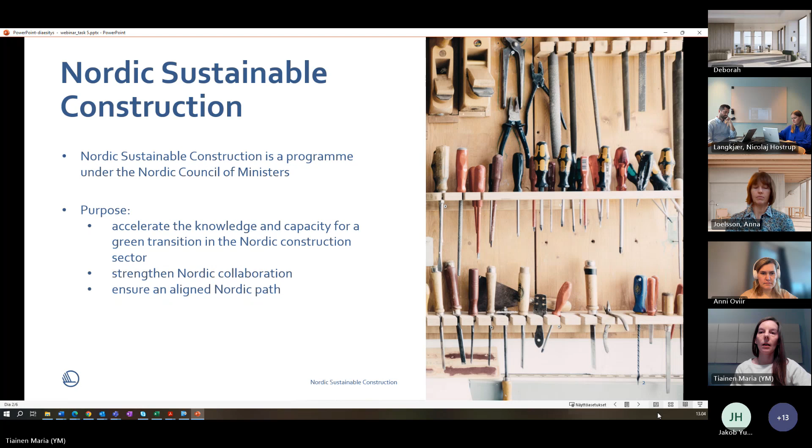The program is organized into the following 5 work packages, working with a specific area of sustainable construction: Nordic harmonization of life cycle assessment, circular business models and procurement, sustainable construction materials and architecture, emission-free construction sites, and program secretariat and competencies for reuse in constructions.

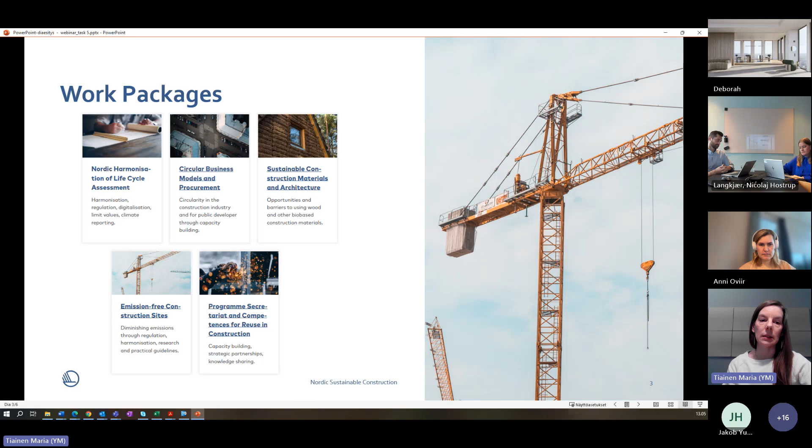This webinar and project belongs to the first work package, Nordic harmonization of the life cycle assessment. In this work package, we work towards harmonizing normative methods for building LCAs in the Nordic countries. Similar approaches will benefit construction industry and policymakers on national and municipal levels so that we can support each other's climate ambitions in regulation and in green public procurement, but also in European policy development.

Here is the subtask of the Nordic harmonization of life cycle assessment, work package 1. So we have 5 tasks: Nordic LCA practices, database and scenarios, digitalization of LCA, limit values, and the 5th task, acceleration program. We will hear more about this today, or one of its subtasks.

The target of the acceleration program is to accelerate the low carbonization of the building sector and support building projects aiming at lesser emissions. There are two subtasks of this task 5, and we will hear more about one of those subtasks today.

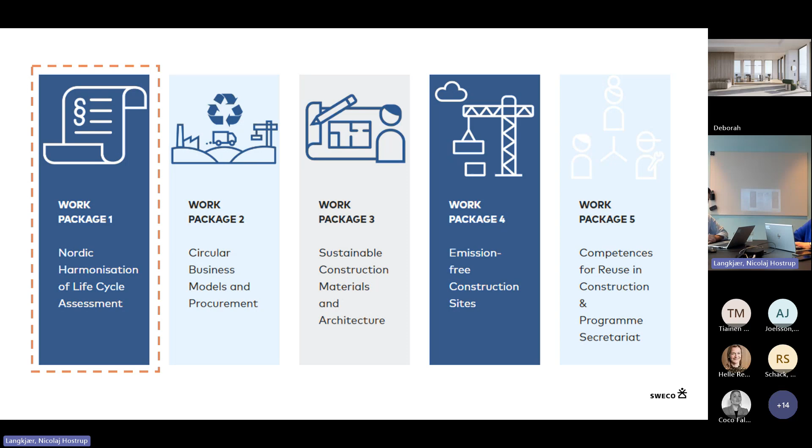It's a very interesting report that I think you should go in and read. It's on the webpage also, the Nordic Sustainable Construction webpage. So the project we are presenting today is placed in this work package 1, the Nordic harmonization of LCA.

Work package 1 consisted of 5 tasks, all with the goal of investigating possibilities and challenges for harmonizing LCA in the Nordic countries and Estonia. There were tasks about LCA practices, data for LCA, calculating LCA with digital models, limit values, monitoring decarbonization, and regulatory needs for harmonizing. This has all been studied, and several interesting reports have been published, all to be found on the Nordic Sustainable Construction webpage. Go in there and have a good read of all these reports.

Task 5 in this work package, which we are presenting today, is this acceleration program with knowledge sharing clinics and a best practice catalog.

It was divided like this: we call it task 5.1 and task 5.2. Task 5.1 is these knowledge sharing clinics, which we are also calling low carbon clinics. That's why we have the title on the report, which is low carbon clinics. Task 5.2 is this best practice catalog, which we launched back in, I think it's a month ago, right before Christmas.

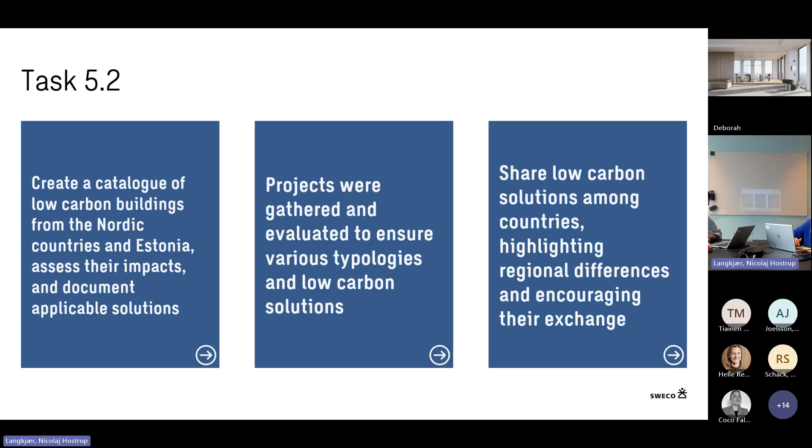In task 5.1, the aim was to increase the know-how in the market. We ended up having 11 clinics with workshops for clients with projects in various building phases. We both had some projects that were in a very early design phase, and we also had projects that were about to be built. The aim was to share these real life decarbonization solutions and challenges in different phases of a building project.

Just a little bit about the timeline for this project: we started out back in June, where we had a first webinar where we shared a sign-up link, and then we had this sign-up period over the summer, and then we started hosting these low carbon clinics. The low carbon clinics consisted of first a startup meeting where we tried to figure out what the client wanted to talk about, what was important for them to focus on, of course with the mind on decarbonization. But if they had something specific that they wanted to go into, some specific solutions, some specific building materials that we needed to discuss, or some specific processes, then we could actually focus the workshop that we held.

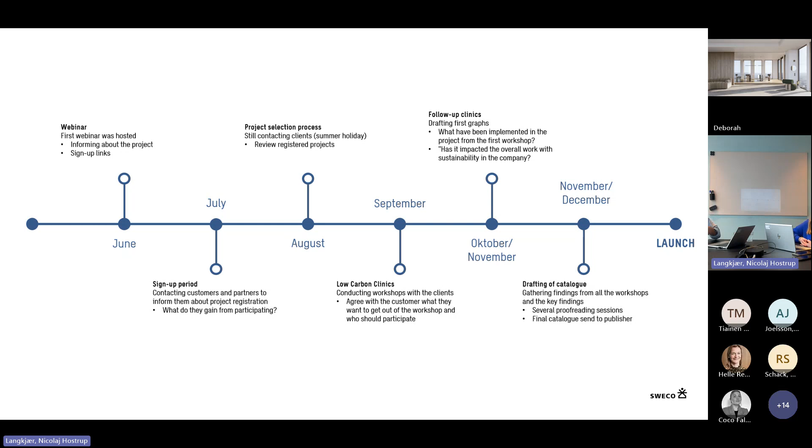After we had this startup meeting with the client, then we had a workshop where we went deeper into the project, both the challenges and solutions. After the workshops, we had some time between a workshop and a follow-up to see if the client had implemented any solutions. We were a bit short on time here, so it was short time to actually implement a lot of solutions in a project. But at least we have some reflections from the clients, from the workshop until the follow-ups. So that's what we're sharing in the report also. And then we of course drafted the report in November, December. So we ended up with these

2 projects from Denmark, Iceland, Finland, 3 projects from Sweden, and 1 project from Estonia and Norway. And I have the link to the report down here in the bottom.

And I will just quickly share some of our key findings for solutions when working with the decarbonization agenda, that we found from these 11 clinics, and then also some key challenges that we found from working with these clients.

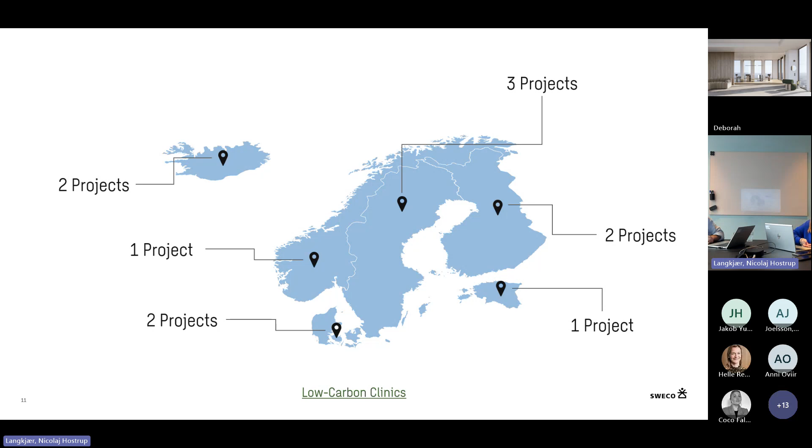So next slide here, we have these 4 key findings that you will also find in the report. So the carbon limit values and continuous LCA monitoring. Several projects focused on adhering to climate budgets and continuous LCA monitoring. One of the projects from Denmark, we found that the client worked with both their own and also the investors' CO2 requirements to the project. So that was a constraint, and that actually worked for them to keep the climate impact from the buildings lower.

And then we had hotspot analysis and data for early insights, which we found to be quite essential for identifying carbon reduction opportunities. This early data insight necessitates collaboration from stakeholders throughout the entire value chain. Some of the clients emphasized the need for new agreements or new ways of working together across disciplines regarding data delivery for these early insights. Because right now, at least a lot of disciplines are not used to delivering this data, and many disciplines maybe want to wait with delivering specific data for constructions, for example. So maybe some new ways of working together or new agreements is the way to go for these early insights on data.

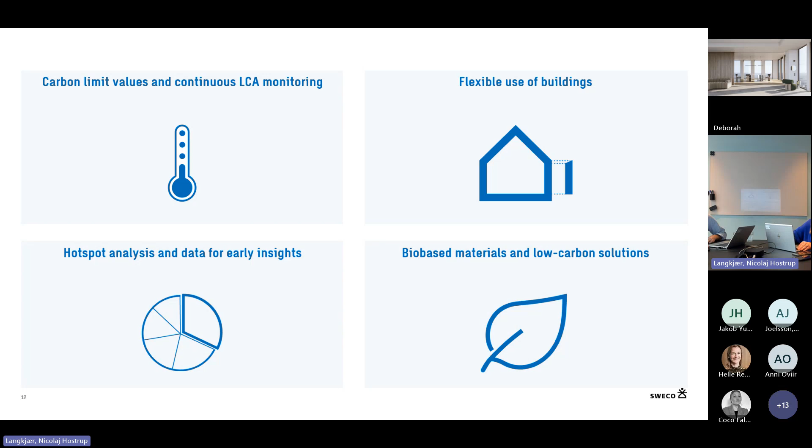So variability in LCA methodologies, particularly in certification schemes, not being the same methodologies as in the national regulations. This is a significant challenge because it requires a lot of time spent on making LCA for one method and then for another method. And you could say that this is also a cross-border challenge. This is what we found from our work in, we also delivered some work for this task 4, which was also presented by Maria, where we found that as it is now, we cannot really compare LCA results across borders because the methodologies are so differently structured. So this is also kind of a cross-border challenge.

Yeah, so we also had material-related challenges, also emphasized in many of the clinics. We had, for example, one of the clinics in Finland where concerns were raised about the long-term performance of some of these newer low-carbon solutions, because they haven't been tested for this long-term performance. And some projects also faced difficulties in sourcing low-carbon materials that fulfill the functional requirements that they needed for the project.

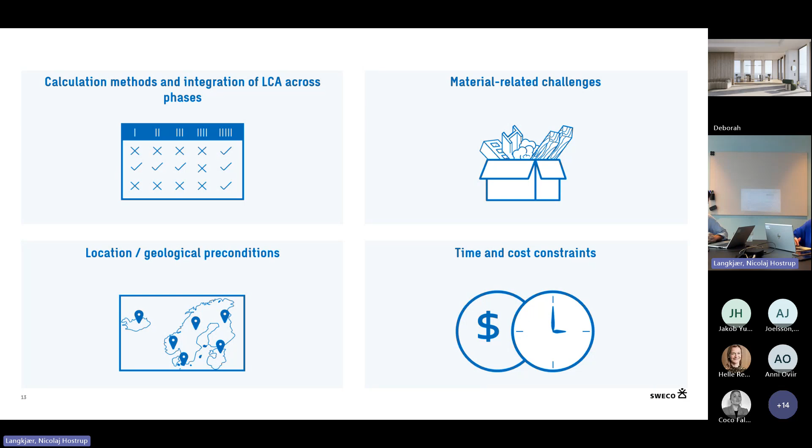Hello, everybody. So I'm Anni from Estonia, and I will represent the Estonian case for this clinic. I'm warning you in advance, I might cough in between, so I'm trying to mute myself for that moment when it happens. I'm a little bit sick.

But yeah, about the project. So the project for this clinic was Loodusmaja, that means the nature house. It's a museum and an office, consisting of 15,250 square meters of net floor area. And it is currently under construction, so it's being built right now.

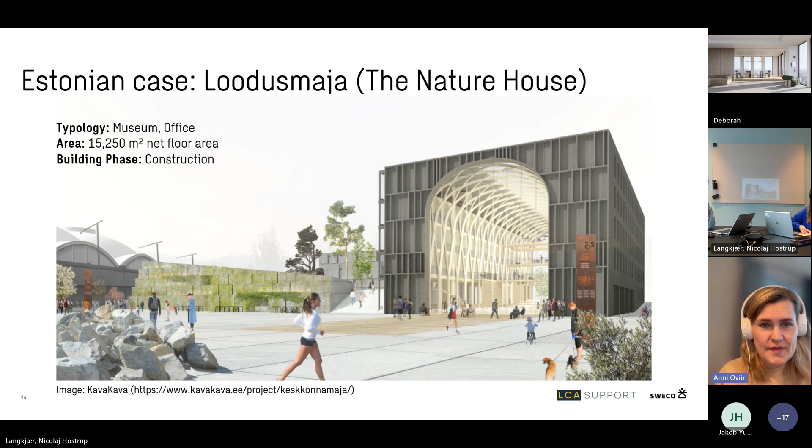So the building itself consists of three parts. The A bit is museum, and the B and C are an office space for the Ministry of Climate, as well as Natural History Museum and other environment-related offices and organizations. This project was very good for me personally, because I was the one who conducted the life cycle assessment for this back in 2020 and 21.

And it is the first public project for which an LCA was conducted in Estonia, so it's like a pilot project in many ways for us. The LCAs that were done were for preliminary and technical design. This previous work was used inside the clinic workshop.

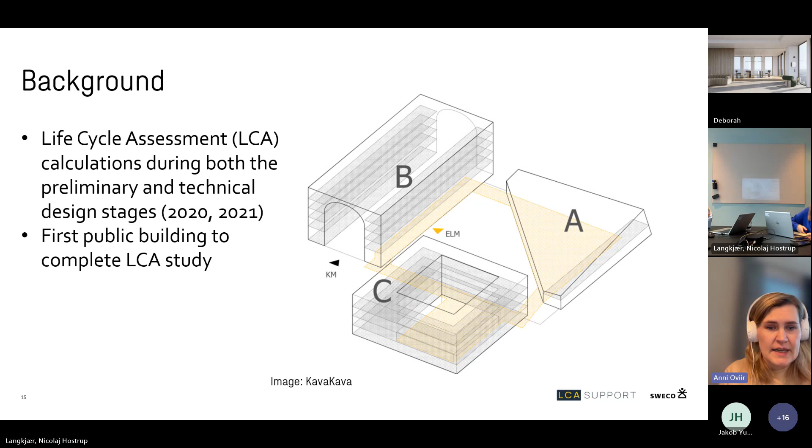The workshop took place on September 18th, and the participants were from the entire project team. So client, the state, people from Riigi Kinnisvara the state real estate manager, the Ministry of Climate, contractor, architects and engineers. In total, we were 14 people.

Unfortunately, I didn't remember to take a picture, but it was a good group we had together. Lots of the people involved with this project today were not the same people who were involved when I first did the LCA studies for this project, so part of this was also just reminding them of what was done.

The key topic we had was analyzing the completed studies. So we went through the LCAs that I completed, and we were looking at what were the hotspots, and just went over the study. It might sound like a very basic thing to do, but Estonia is not as far with low carbon construction as the Nordic countries are.

We are aiming to fix that, but at the moment it's not common practice at all to calculate LCA for a building project. It's rather a rare case if the developer is looking to the future, or typically developers who have more resources to do so, and sometimes in cases where the owner is pursuing a green building certificate, but generally it is not common practice here. So this is like a very important pilot case for the public sector.

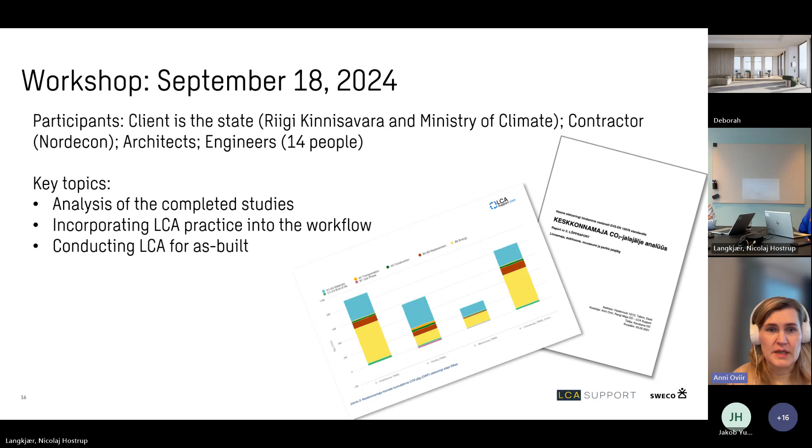And the last key topic was how to conduct LCA for as-built of this project. That was something Riigi Kinnisvara was specifically interested in, because they want to understand how to put together LCA for as-built projects. That is also a first time in the public sector in Estonia, and I'm not even sure if generally there has been any building projects in Estonia where as-built LCA has been conducted. So that was one of the most important topics in this workshop.

We'll stop on the key takeaways and try to open different angles on what came out from this workshop. First, we discussed how to integrate the process. The process really needs to be mapped out, and we don't have a very clear understanding yet of how this process should go.

Coincidentally, yesterday I had a meeting with the Estonian Digital Construction Cluster, whose members are also people involved in this project, and we discussed again that it's about the process. One of the things mentioned was that it's very unclear at the moment who is the party responsible for conducting an LCA. It's not clear who should take responsibility, who are the people who actually need to learn about LCA, or who are the people on the other end who might need to check the LCA so that quality wouldn't be poor once the LCA requirement comes into place.

For background, the roadmap for Estonia has also changed. We had understanding until the end of last year that the mandatory requirement for calculating LCA would be enforced 1st of July 2025. But with the delay in taking over the climate law, that has also postponed implementation of the regulation requiring LCA calculation, so most likely it will be in place 1st of January 2026. That has even more created a situation where the market doesn't necessarily have the initiative to start understanding the process and to figure out who should be responsible for this calculation. So that was a big part of the discussion in the workshop.

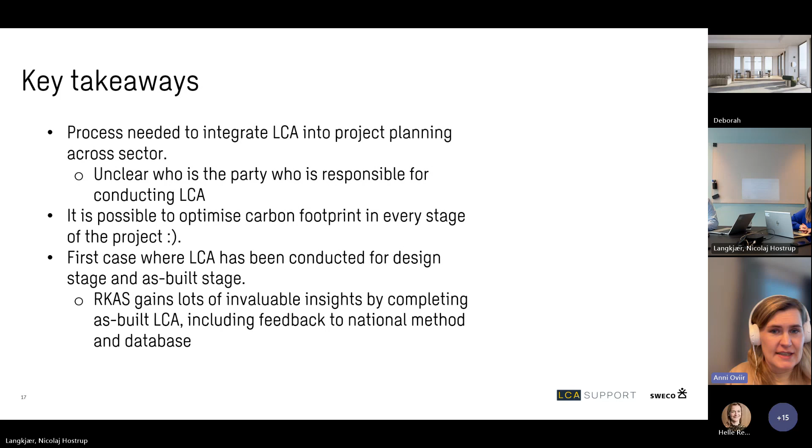So all in all, how I would like to sum it up perhaps is that Estonia is really in the beginning of this whole journey, and through this project, part of task 5, but also other tasks, has actually brought lots of knowledge to Estonia. We have learned massively from this project to get going with this topic, and I think from here on we can only improve.

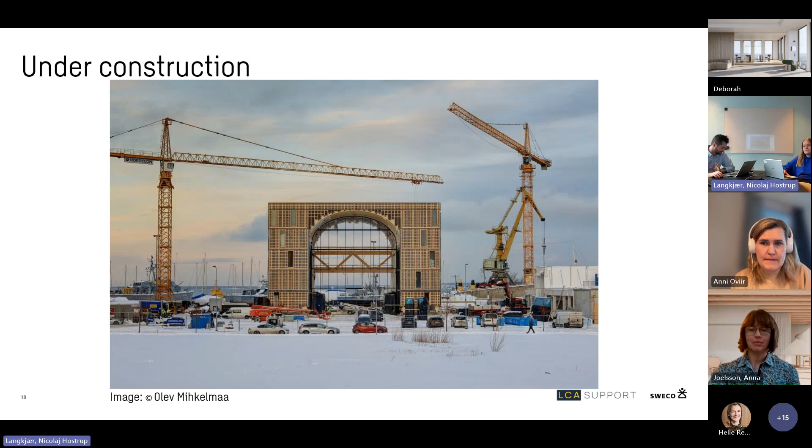Yes, hello everyone. I'm Anna, working at Sweco in Sweden, and I took part in 3 workshops in Sweden for 3 quite different clients. Catena is a developer of all kinds of logistics buildings all over Scandinavia. Then we have OBOS, one of the larger developers of housing in Sweden and Norway, and then we have Umeå municipality in the north of Sweden. All of these clients have high ambitions, lots of knowledge, and have come quite far already in reducing CO2 in their projects.

And in general, it was these ambitious clients that applied for the workshops in Sweden. That was a clear trend. But of course, that does not mean that there are no challenges left. So if we take the next slide...

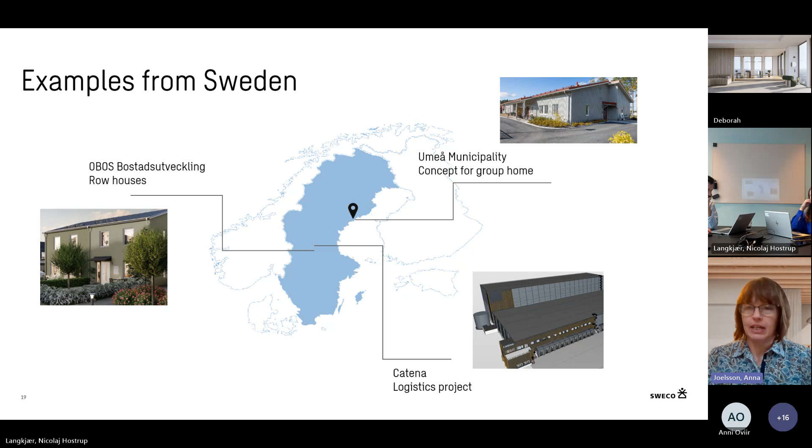We start by talking about logistics projects, and just to mention first some special conditions of a typical logistics building that can affect the results of an LCA calculation. For example, a warehouse can have a high ceiling and thereby larger outer walls compared to indoor floor area than other projects. Since carbon emissions in Sweden are reported per gross floor area, this might give an impression of high carbon emissions compared to other buildings.

But then again, this type of building typically has few inner walls and maybe a small amount of room completions, and this can work in favor of showing lower emissions than other buildings of the same size.

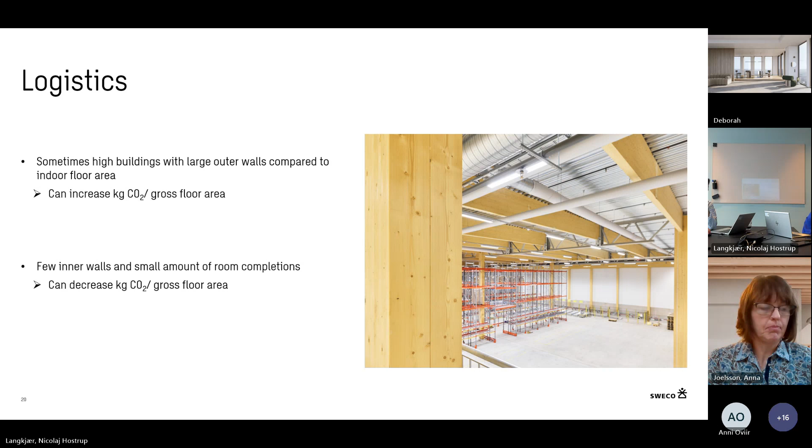If we go to the next slide, we also discussed at the workshop some technical issues, and the main one was how to find an alternative to the traditional outer wall construction with sandwich panels, which are common in logistics buildings because they have a quite high climate effect and large emissions in production. But there are several benefits for the contractor and developer working with sandwich panels, not least that they are fast to assemble, require little maintenance, and have a relatively low cost. So these reasons are why they are so extensively used.

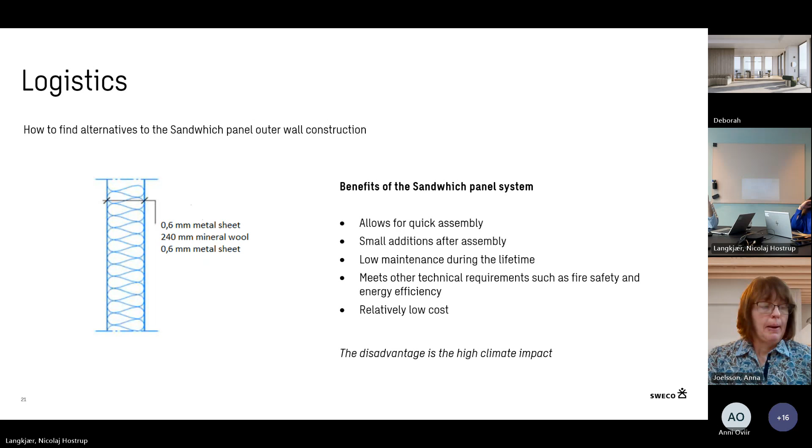So you can see that there is a difference, and it's relevant to compare things. The problem with this particular wooden wall is that the cost increases, which is negative for the project, and also that the facade is not included in the construction. So the emissions vary quite heavily depending on the choice of facade. That's the red dotted bar that you see, which represents the span of emissions depending on what facade you combine this construction with.

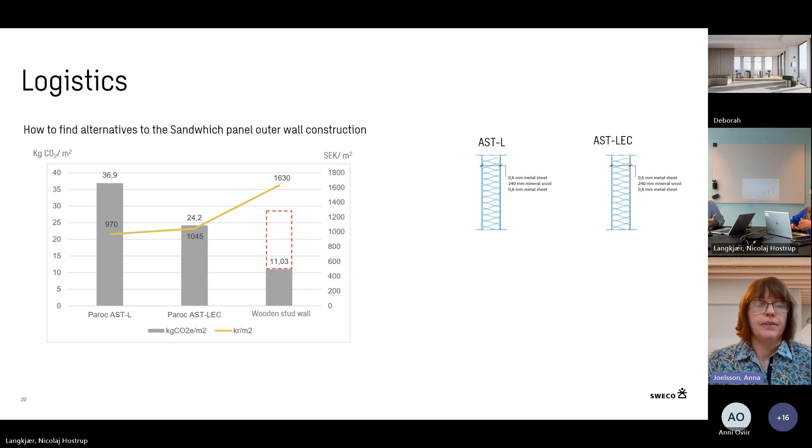But it doesn't really end here. If we concentrate on these two different sandwich panel walls that we had, the ones to the left and in the middle, maybe you noticed that I said they are identical. So the same type of materials, metal sheets with mineral wool in between, and they have the same dimensions and thicknesses. So then, why the difference in emission?

And this is where the complexity comes in, that when doing this kind of technical comparison, you end up having to dig deeper and see, well, what is the difference? Why is this? And which one of these should we choose? Can we trust these numbers? So if you go a step further, we can compare some numbers for these two wall types.

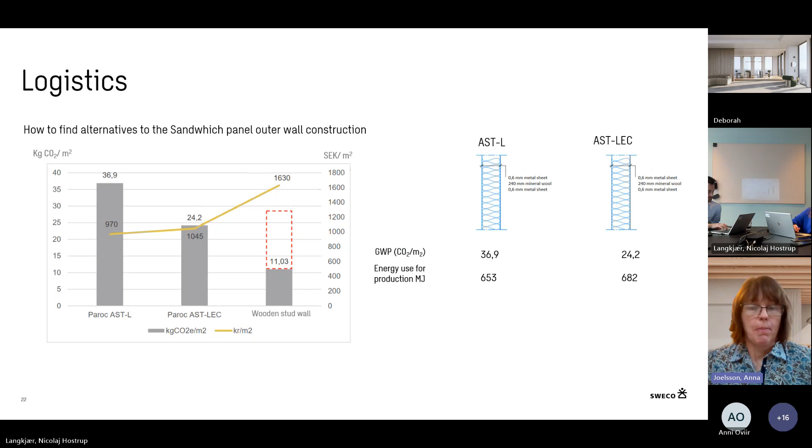And when I did this digging, I actually found that the low carbon alternative, which you see here to the right, actually required more energy for production than the traditional product. But if you go a step further, we can dig even deeper and see, well, what could be the reason then that the low carbon one to the right has lower carbon emissions when they have higher energy requirements?

Well, it seems like the factory in which this wall to the right is produced, it's the same manufacturer, but they have two different factories. And in the factory for the low carbon panel, they have a contract for renewable electricity, which means that they can count the electricity in their EPD as zero carbon. And they also use a larger amount of recycled steel in the product.

So we discussed this a lot, that you might have to dig quite deep into technical documents to see these differences, and then also discuss this number. What do we do with this, and how do you value this kind of information when you make your choice of material?

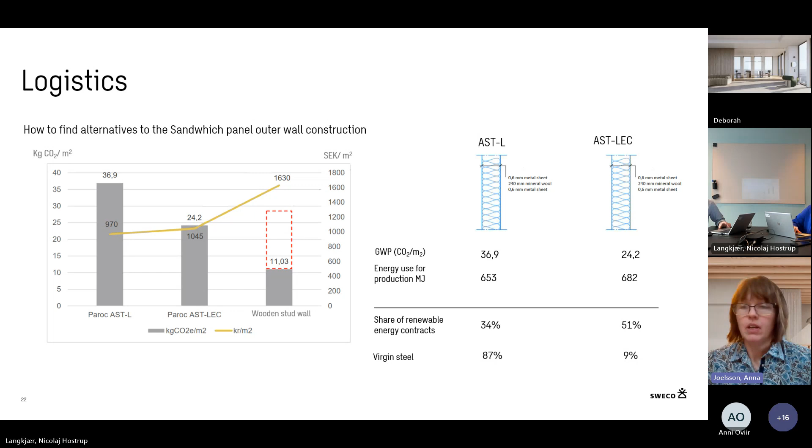So these cities have signed up to achieve climate neutral goals, and then of course they have to push the construction sector. Therefore many of them today are in the process of setting their own limit values and developing their own calculation methods for how to report this, since the law doesn't have limit values and so on. So then these types of developers ask themselves, how can we manage this? How can we keep up with this knowledge? How many local methodologies is it reasonable that we should have knowledge on, and how do we handle this?